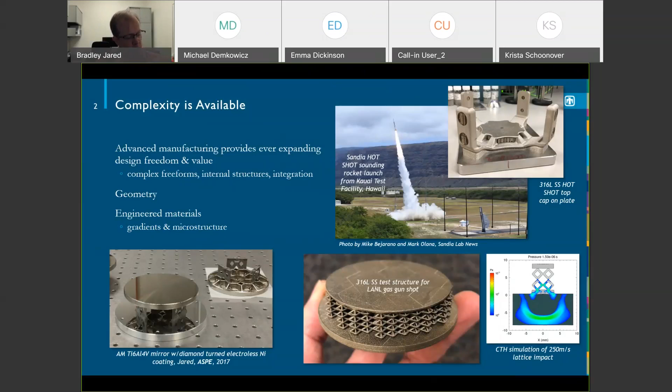Let's see. I'll talk real quickly about some of the work we actually do at Sandia, to give you a flavor in the additive space. I don't think anybody's talked about this, so I'll talk first about some of the LENS process.

This is actually a process that came out of Sandia in the mid-90s. LENS is engineered net shaping, also called directed energy deposition by a lot of people. This is a powder blown process where you basically have powder flows, and where it converges with a laser focus, you get a melt pool and you deposit material.

This is actually a custom machine we have in our lab where we can do multi-materials. You can see some things there. There's a lot of work we're doing right now with high entropy alloys, the new alloy system. So this system is very flexible, it's open, and we have control of all aspects of the hardware and the software. That gives us a lot of unique capabilities for process monitoring and stuff like that.

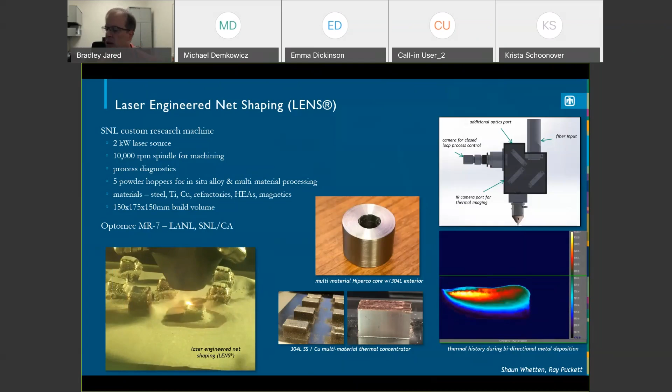We also have a sister facility in California that has a similar machine that's a commercial available counterpart to this.

Another area where we're doing a lot of work is looking at wire feed deposition, so again sort of a DED process. Now we're using wire instead of powder for a number of reasons. One is safety, right? Wire is not explosive. Powder and many of these materials, particularly reactive alloys like aluminum and titanium, are explosive and have a lot of safety risk. But it also allows us to scale up and generate much larger parts.

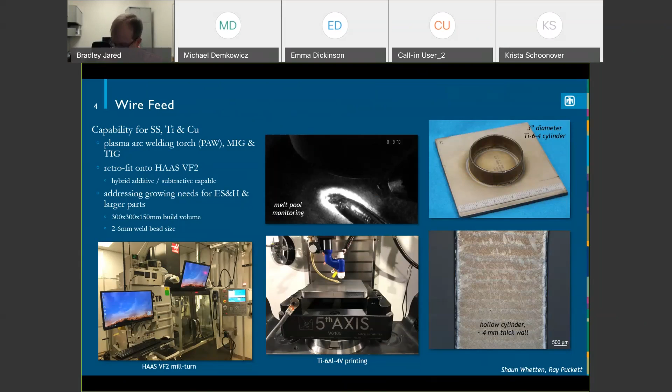This is a growing area here at Sandia and other places, large parts for large applications. A lot of times these are maybe not a net shape part, but a near net shape part that still requires a lot of machining. We've been doing a lot of work here with a range of welding technologies, and this is actually some work I'll be doing when I go to UT. You see the capabilities as an example of work we've been looking at - some simple geometries, materials look really, really nice, and we're trying to understand those sorts of things.

Another area where we do a lot of work here at Sandia in the additive space is in the direct write space. You'll see the context there in the bottom, Adam Cook and Bryan Kaeher. These are not necessarily metals - usually they're not metals, although we can do printed metals with nano inks.

There's a range of processes we have here. A lot of these are depositions or jetting processes, maybe extrusion casting. You can see there's a wide range of materials available on a wide range of substrates. At Sandia, we cover the entire gamut of this process, from formulation of the inks and materials and paste and feedstocks, to synthesizing those elements, to characterization, and finally to printing and curing and sintering and all the things that are involved.

So we kind of cover the entire process chain in this space, and we've done things from printed circuit board types of things - you see at the top, you can put conformal prints. We've actually printed battery structures and tested those and done cyclic loading on those. There's quite a bit of work looking at compression pads - you can see the pad on the side there, the sort of silicone-based geometry. We looked at different traces and inks and materials that can even cure at, say, room temperature.

We've also done quite a bit of work in the ceramic space. These are all areas of growing research interest, and a lot of work that really impacts our mission. So really exciting capabilities in this space, different from what I'm going to talk about, but again some of the same problems apply.

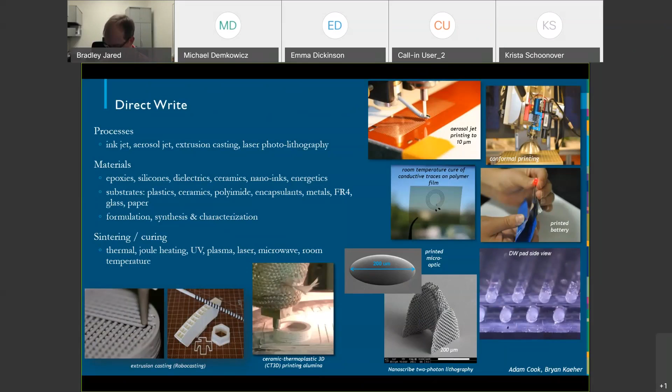An area that's really unique with Sandia, and actually the other national labs, Lawrence and also Los Alamos, is our interest in energetic materials for our mission space. So we've actually done quite a bit of material - this slide is Alex Tappan and others have done. Some of this goes back almost a decade or more, and this is work where we're looking at depositing energetic materials for a number of reasons.

Some of it's safety, some of it's performance, but these are all materials that are typically using sort of a direct ink write process we saw on the previous slide. It's all work that we're doing at Sandia to really understand, and this is actually a growing area for us for a number of applications. But it's very distinct and it's sort of unique too.

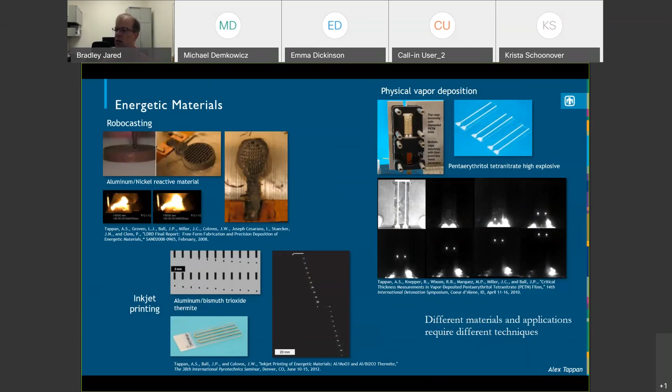You're not going to see a ton of energetic materials in the additive literature, although that's growing. The process I'm going to be working on and talking to you primarily this morning is laser powder bed fusion. This is a very popular metal technique.

The machine in our lab where almost all these parts have been made is a ProX 200 by 3D Systems. It's a continuous wave ytterbium single mode fiber laser. We run at about a micron wavelength. Max power is at 300 watts. We typically run about 100 to 110, and then we have about a 100 micron spot size.

We've built lots of parts with these. A lot of times this is a turnkey system, so we run it overnight and do a lot of things like that.

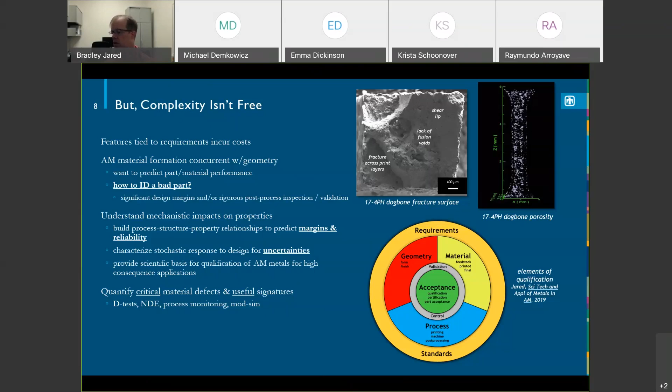One of the ways we've been tackling this problem at Sandia—this is actually a program that was completed a couple years ago, but it was a large research project called Born Qualified. The title is 'Changing the Engineering Design & Qualification Paradigm,' a philosophical comment.

We have the process, we have the parts, we think about trying to make measurements, we try to develop, understand and characterize the properties, we develop models, and then we do predictions. We put all this stuff in a feedback loop, and then we come back to something that's refined, which is the requirements. So there are all these elements in the work we've been doing.

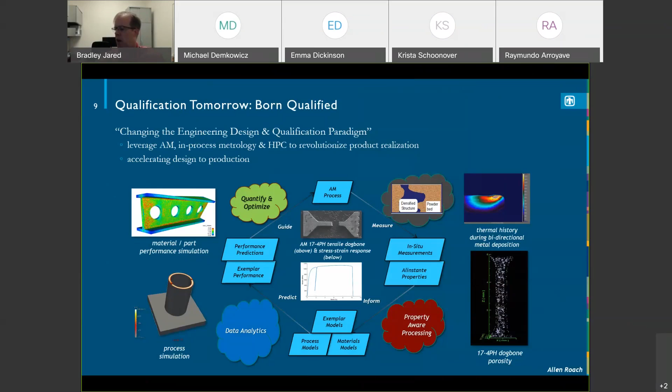I'm primarily talking about the process space. It's a little bit in the measurement space and the property space. I won't talk much about the models, although the next slide talks a little bit about the work that we are doing at Sandia. This is not my work.

This is for laser powder bed fusion. We have things going from the powder scale—this is actually DFT and molecular dynamics—all the way up to part scale, where we're looking at residual stresses and deformations, and all scales in between: microstructures and those sorts of things.

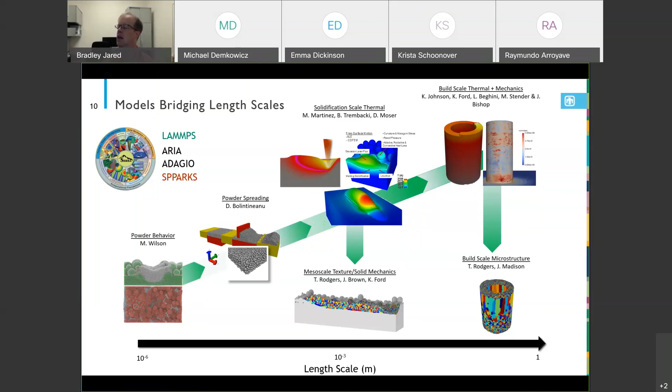So there's a lot of things going on here, and we've been working on it. It's a multi-scale, multi-dimensional, multi-temporal scale type problem that we've been working on. So a lot of different pieces of this, and a lot of the work you'll see is feeding into some of that.

One of the things we learned very quickly was that with a lot of this complexity, we can actually generate parts very, very quickly. One of the things from a project I was leading early on, 4 or 5 years ago, was the fact that we have the ability to create material very quickly, but we have to characterize it just as quickly to stay on top of the game.

So this was some original work for a high throughput tensile tester, because this is sort of where we started with trying to validate materials. We're using direct digital image correlation, DIC. You can see the bottom right animation of the actual real-time image pulling, and it gives us stress strain curves.

So what we start off with is the concept at the bottom, where we have these—we call it a cooling fin, because it's kind of what they look like a little bit. These dog bones, we cut off with a wire EDM, and then we can load these into the drop-in tensile testers you see at the top right. One of the things that was nice about this is it changed the paradigm in our lab about how we are doing tensile testing.

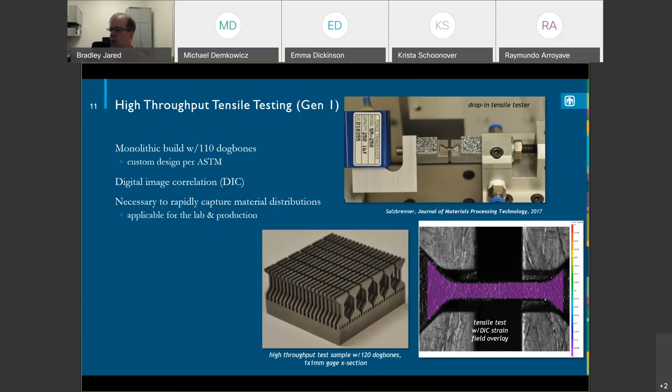Typically we use extensometers and fairly delicate, intensive setups, so a lot of times you'll get maybe 10 samples a day, or 20 if you've got a great technician. This actually allows us to do samples dropped in with custom grips on a load frame, doing maybe 10 an hour or more. We've actually demonstrated more like one every minute or so. This really changes the ability to capture large data sets.

This is important because one of the things we've learned looking at these materials is people ask lots of questions about whether additive materials are as good as wrought or whatever. My answer is always it's different. If you think about a wrought material, a casting, a forging, a heat treat, or a rolled material, they all have different properties. A lot of what we've been doing is trying to understand and quantify those materials.

Here's some early data on 17-4, which is actually a relatively poor material at this point. But the real key here is that there's a very wide distribution and spread in the stress strain curves of this material. Typically as a mechanical engineer I think about materials having a property — a modulus, a yield strength, an ultimate tensile strength, or whatever.

And it's always true, but in additive we have things like defects, surface finishes, and microstructure variations. What happens is we have a much larger spread in the material data. I have some data, I don't think I have it here, where a wrought curve sits pretty close on top of each other. So we start thinking about how do we handle distributions.

We've done work with Weibull distributions, which are very common in the casting industry and also ceramics, where you start thinking that if you get enough samples, you can establish some sort of probability threshold at which this material can perform. That can then inform how you make decisions in terms of design.

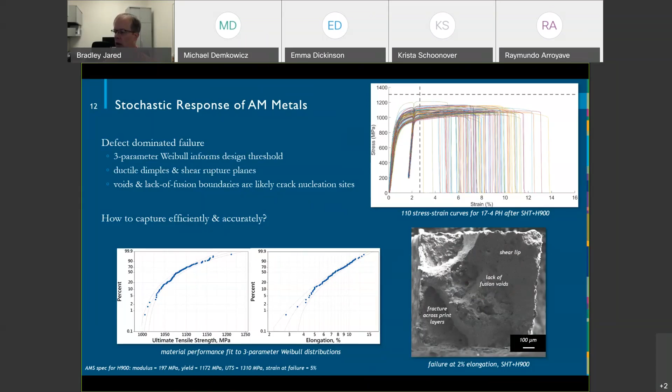Part of the question is how do we get this data quickly and fast, and that's what a lot of our work has been about. But this is, again, quite a bit of uncertainty. If you look at the wrought material here, the strain to failure range is maybe 1%, and we've got almost an order of magnitude higher than that here. So there's a challenge there.

A lot of the work we've been doing over the past few years has actually been trying to take understanding of material structures and tie that to the properties themselves. There's a modeling aspect of this, an inspection aspect of this. We've done a ton of work with micro CT, which is becoming an industry standard for inspection of additive parts. It's got limitations, but it's also got a lot of ability.

We did a lot of work early on trying to understand porosity fields and largest defect size and these sorts of things. There's a publication showing all the different porosity metrics you can come up with and what those look like — there's a number of them. So the question is, what's important, what matters? This slide's going to be a bit of a worst case, the next one's going to be more encouraging.

This slide shows a worst case. We have two different dog bones, B and C. We look at those porosity fields and think the one on the right, C, is going to have a much lower strength and lower strain of failure because there's a larger porosity field with more defects. You'd expect a large difference in performance. But when you overlay the stress strain curves, they're right on top of each other. So there's two sides to this — one encouraging, in that these defects matter, but how much do they matter? Maybe these materials can be more robust than we thought.

The other side of that is, okay, well, now how do I actually predict which one's good or bad? Because in the previous slide, this is data from those images, and you see a large spread. So how do we figure some of that out?

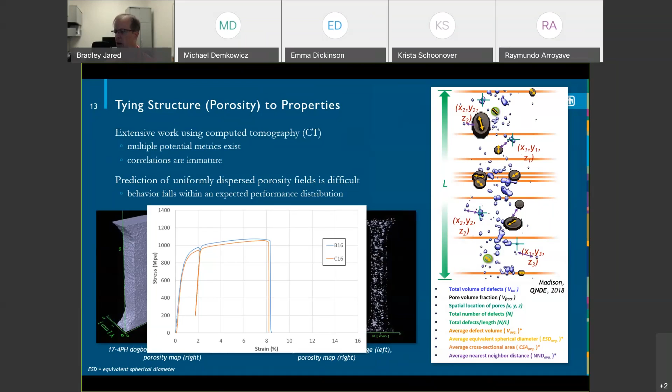It turns out, in this space—this is some other work on 316, whereas the previous slide was 17-4—you really start seeing that the models are really important and valuable. Kyle Johnson's done a ton of work here at Sandia in this space, along with another Sandia researcher, John Emery.

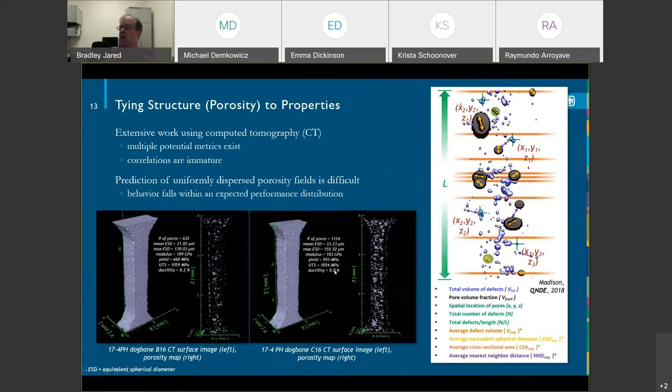What happens is if you have large gross porosity—if you look at, whoops, sorry, wrong slide. If you look at the slide I showed a second ago, it's kind of hard to say there's a worse pore in here, or that there's a really large pore. There's sort of a pore field that's fairly uniform. When you see that, you start seeing behavior that looks fairly consistent across a lot of these cases.

What we found is that if we have these large pores—this is pore size—you see this red one right close to where localized necking and failure occurs in this 316 part. You can start saying something about quality.

So we've shown that if you have material with a reasonably uniform porosity field, that's something you'd expect to fit into a distribution. What really happens is you want to think about when you're outside of that distribution.

Now what you're looking for is these large defects. That helps you think about and understand a design and qualification paradigm that will work.

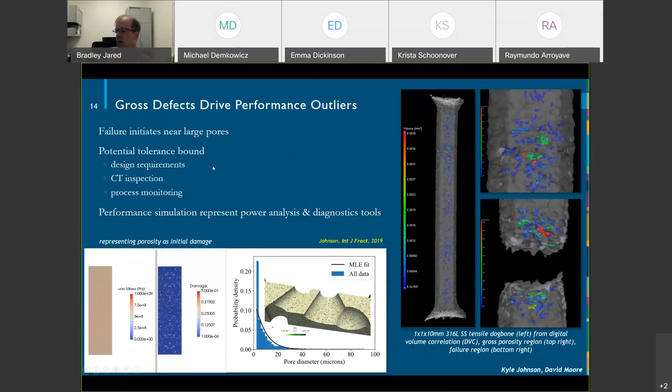If we can define minimum or maximum pore sizes, we can start saying, okay, how do I put tolerances on inspection, process monitoring, or even design. These are all things we've been working on.

One of the things that's really interesting in this space is that these parts have a lot of surface roughness on them, so you can actually get size-effect properties. People want to talk about material properties in additive components, and the reality is it gets really complicated sometimes.

What happens is we think about structural properties—you have to really understand the dog bones. This is some work we did and published.

What's essentially happening, if you look at the finite element model here—you can characterize the porosity not on the inside, but on the outside, the surface finish—you actually get a pretty reasonable trend. So we attribute a lot of this size effect to the surface finish and how you have damage initiation and cracks effectively on the surface.

The problem here is if I have a surface finish that's fairly constant—say my process has a 20 micron surface finish regardless of the size of the component—that translates to, for the 6 millimeter part, really not having much effect. It's not a big deal. You can think of this as bulk properties.

Now, if you start talking about a 400 micron sample, suddenly 20 microns—if that's Ra, that's effectively peak-to-valley of maybe 100—means a quarter of your part is essentially a crack. It dramatically reduces the strength properties, and you see that here.

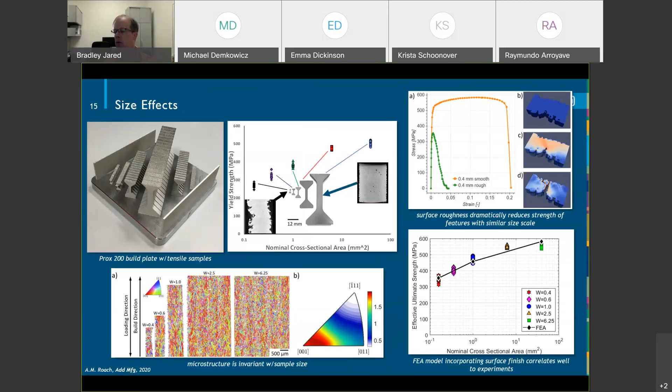We understand this, and we've been using it in lattice work and other areas to figure out what properties we need to design for a component. So we start looking at minimum feature sizes and stuff like that. This is all important.

This shows a little bit back to the process distribution—these were some early parts we received from an external vendor, 17-4.

Basically, the message here is we didn't know a whole lot about the process. We didn't know the settings, the machine type, the pedigree of the material, or anything about the operator. We didn't know about the build environment—whether they were using argon, nitrogen, those sorts of things.

This is basically 8 different tensile arrays, roughly 1,000 parts, and we see a very large variation in these, and it's very concerning, right? You see microstructure variation, you see porosity variation, and really this was not very comforting as we looked at material uncertainty of some of these materials, and so it raised a lot of questions.

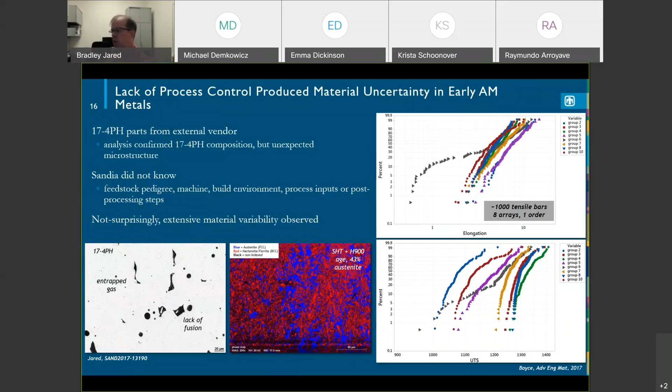I'll show a slide later that shows sort of what we've done to make improvements on this. But this is a problem, right? We don't have any control. So this is a process that's not being controlled, and it's not very good.

So one aspect of bringing control in—this is work that Michael Heiden in our group has been doing on 316 stainless steel. We've been monitoring the powder now in our machine. The previous slide was for parts we got from a vendor. This is now a Sandia material that we're processing and characterizing with every build.

One thing we found in 316, it's fairly robust, right? So now we understand if we reuse the powder, we're getting properties, we can see some of the very minor trends. But it's really important for us to track this. So every time we build a part now, we sample powder and we capture that. Now we know sort of how often we can reuse the powder and the reliability that will give to us.

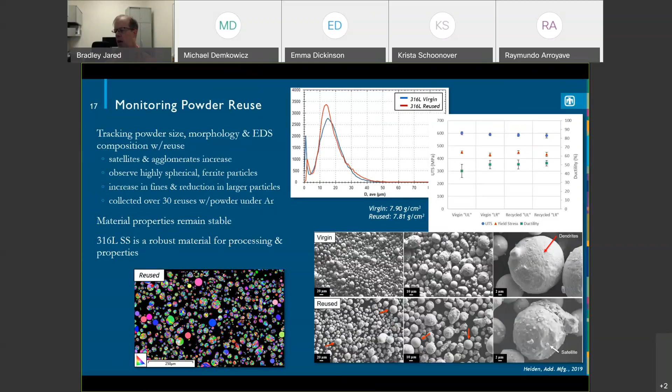Another piece of this is actually understanding the machine system itself. This was some work we did on our ProX. The image on the left shows some issues we had—actually a thermal lens effect. Basically what happened was our 100-watt laser, our 1070 nanometer laser, was heating up the focal optic, the F-theta lens in the front of the machine, and we were losing focus.

After about 10 seconds, essentially our process conditions were changing quite dramatically, and so we couldn't actually build material. We figured some of this stuff out, applied some offsets, and this is essentially the same build—this is without an offset change, and this is with it. You can see the dramatic difference in the process itself.

The key here is that a lot of people in the additive space buy equipment, kind of plug it in, and don't really understand their material or their machine system. These are all things you have to characterize. They're not necessarily difficult to do for the most part, but they're critical to getting a process that's going to be in control and within specification.

Some other work we've done—the top right here is actually looking at layer thickness, which was not something people look at very often. You see people talk about the laser, velocity, power, beam size and shape, and all this, but we've actually found that layer thickness has a very large impact on the material properties and also the reliability of the part.

This is an area where we were just measuring basically the motion of the stages, right? We see quite a bit of variability here, which is sort of in the range of what we think would be acceptable, and it seems to work quite well. But this is an area where we actually need to do a little more work. This is something you have to characterize.

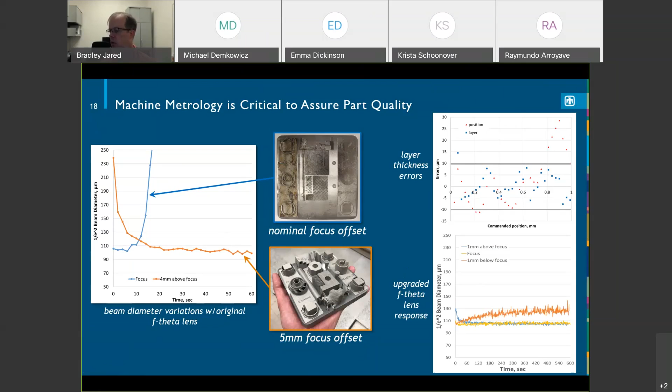The bottom right is actually from the thermal lensing problem we did work on. We actually upgraded our lens with the vendor, and this all went away. So this created a bunch of challenges—we've resolved those now, and so now we have a machine that's very robust. We're printing samples daily with a lot of reliability and trust in what we're getting off the machine.

One of the things we did is I had a student working on process structure maps. In addition to understanding the powder and understanding the machine, we wanted to understand the process space. So we did a very extensive study, over about a year and a half, looking at all the different metrics on the machine itself and how it performs.

We did a bunch of different experiments. Some of this is a little bit of a brute force exercise, but it's been very helpful to us to understand the process and how to approach a machine and understand what it's capable of doing.

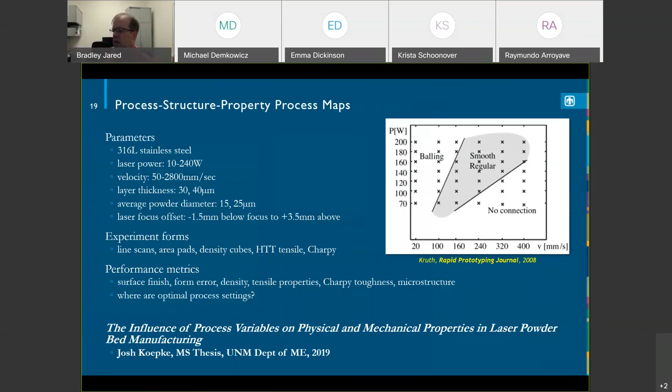In this space, a lot of people talk about process optimization. I tend not to use that term anymore because I don't believe anybody's optimized for hardly anything. They may optimize for a parameter they think, but other things are impacting that, and I'll show you that here in a second.

First thing, we started off with simple line scans. These are actually super easy to do. The challenge here is actually characterization. This scan is actually just lines on a solid plate or on a buildup of powder, or what we call a pad. The run itself takes a few seconds, right? You hit go and you blink and it's over.

But what we do is we cut these up and characterize them. They give us a really good indication of process settings, of melt pool conditions, of depth and width, whether we're getting lack of fusion or balling or keyholing or stuff like that. So these are really, really effective.

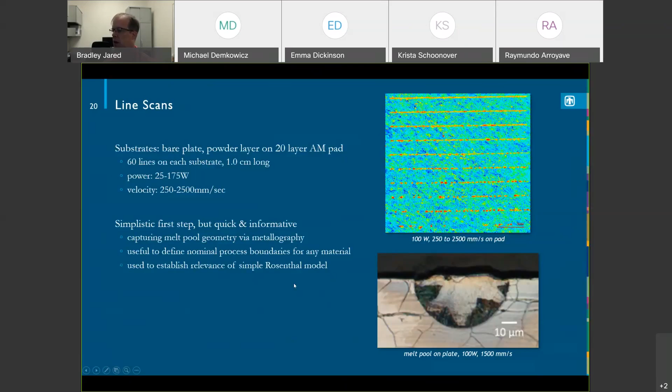We then can also translate that and do that on a pad, a little more work, not a lot, and we can do the same sort of thing. And so you'll see the trends are slightly different, but these are great starting points.

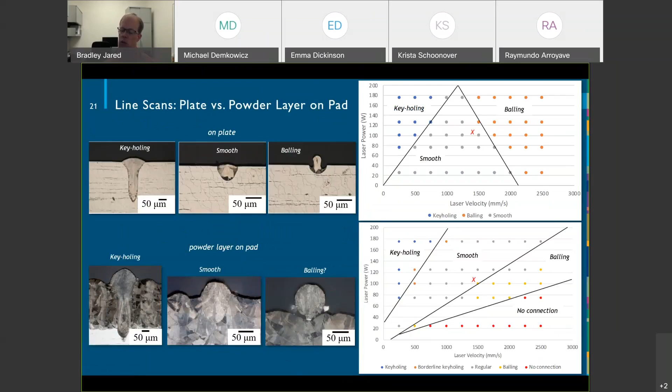One of the things we did here was we took a very simple model and fit to this. And so we have the ability to take both experimental data and even do some model fitting to do some prediction. It says, hey, if I have a layer thickness of 30 microns, what's my melt pool depth that I want? What does it need to be, my hatch spacing, to create dense material? We can do those predictions.

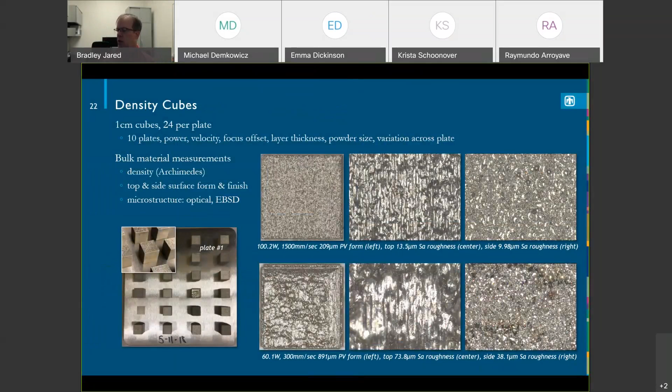We also did a large work in looking at density cubes. So there's a range of things we looked at here. Density is a metric that almost everybody uses, but it's not the end-all be-all, and I'll show you that here in a second. We also looked at surface finish, and you can see a whole range of finishes on these parts. We also looked at microstructure, and I'll show you some of the results there, because there's a wide space here in which the process will actually work.

So here's actually some results from that. Looking at the vertical axis is the laser power, the horizontal axis is the scan velocity, the circles are all areas where we run parts. The open circles are parts that failed in this space, and then the closed circles are parts where we actually were able to print cubes.

So you'll see in some spaces we actually have some surface finish data, which is related to the fact that we built a little bit, but not enough for, say, a density measurement. So you'll see a range, high density is up here in the top, but if you look at the other metrics around surface finish on the top or on the side, or even sort of form—say the waviness or the flatness of the top surface—just because I get good density doesn't mean I necessarily get good surface finish, right?

So when we start thinking about process optimization, it really needs to be multiple factors, multiple constraints in terms of what you're looking for. That's a key piece that a lot of people don't look at. If you look at this X on this image, this is actually our nominal settings for our machine itself. Turns out when we look at all this data, I don't know how the vendor got to this point, but the point they've given us is actually reasonably good for creating parts that have good material properties, good surface finish, and reasonably good form accuracy.

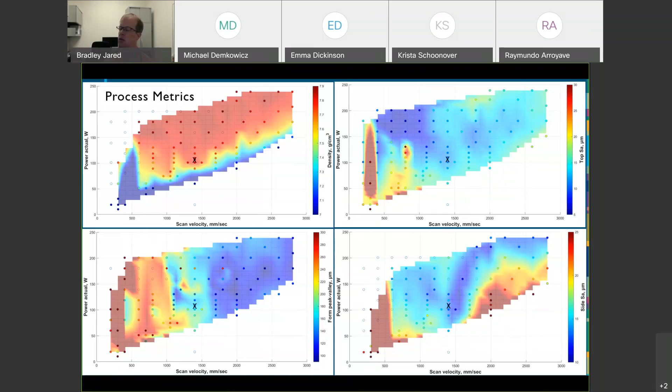I don't know how they converge to that point, but it's interesting that our settings are somewhere in a place where you'd want to be. It may not be the minimum surface finish, but it gives you a good constraint on all those metrics. With microstructure, one of the interesting things in this space is everybody cares about material properties, and you see a lot of variation in these machines, with lots of wailing and gnashing of teeth about why this is a problem. This is part of the challenge, and part of the reason why.

These are all cubes that built just fine. Some of these are actually quite good density, but the microstructures are quite different, and this is going to change the properties, as we'll see in a second. So now you have to think about what's acceptable, what do I need, what can I work with. But you really need this kind of data and understanding of the process to really say, yes, it's working, it's doing what it needs to do.

It really turns out you have a wider process space, at least in powder bed fusion, than a lot of people sometimes think.

So this is actually showing the settings, 120 watts. This shows what happens if you just change the powder layer by 10 microns. So this is 30 micron versus 40 micron change, and you see a dramatic increase in porosity and a reduction in the microstructure, the grain size. These are all things a lot of people don't always think about, like layer thickness - they just think it's 30 microns, but it's not really, it's a variation.

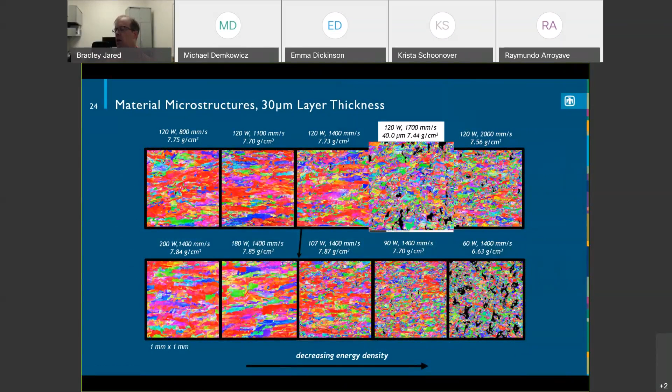So these are all things that probably introduce a lot of the variability we see in the processes in some cases. A lot of the data you're seeing here is actually from our Gen 2 high throughput tensile tester. When we started the Gen 1 work, we realized it worked extremely well, but we found the bottleneck was actually having to have a technician or student loading samples by hand every minute or two.

So what we did was we went in and changed it - we added a linear axis to our load frame, and now we're using DIC from the side instead of the front. We're automating, so now this will hold about 50 or 75 tensile bars. We can load up a frame and the technician can walk away from it for an hour, so now we can load things at a much faster rate.

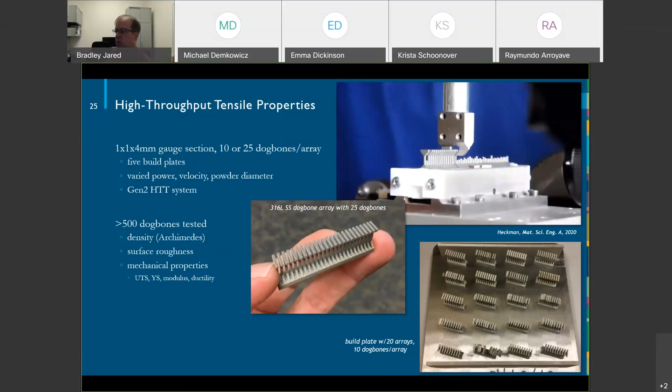We use this quite frequently. In the 4 years this system has been up and running, we've printed and tested probably multiple thousands of tensile arrays, so we've got a lot of data here. One thing that's nice about the samples is we can get things besides tensile properties - we get density, surface finish, all those things off the system.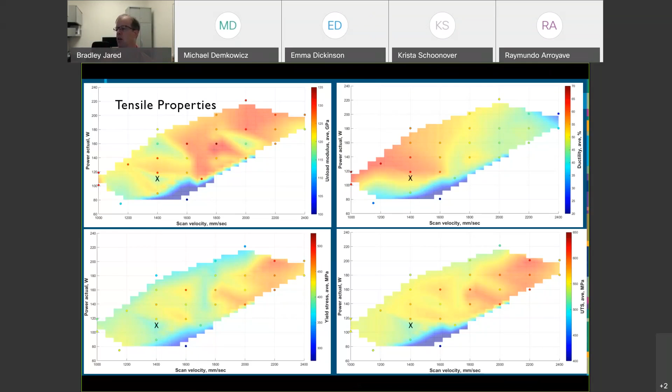So depending on where you want to be, we actually did some work where we were getting ductility a little lower than we wanted at nominal. We showed that if we increase or change our settings, we can actually increase the ductility of this material, maybe at a reduction of yield strength, but that was acceptable for that application. So what this gives you is another design knob - I can take my process or my geometry and tune the properties of my part. This is really exciting to the process folks and even possibly to the designer, giving another level of control that may be useful.

So here's actually data, taking all these pieces, the powder, the machine, the process, the settings, understanding those types of things, understanding porosity defects. This is a similar scale to the slide I showed earlier with 1,000 dog bones. It's not 1,000, it's more like 600, but this is data over about a year and a half, two years on our machine with an upgrade in the optics and also changes in powder. You can see a much better, much tighter distribution in terms of properties. Still a spread, still a variation, but the distribution is much tighter.

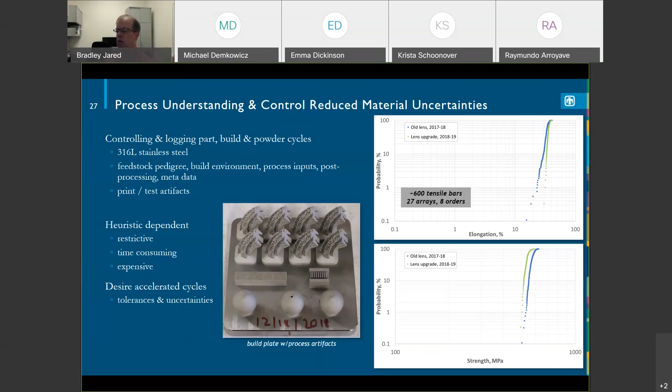We have much more reliable control of what's going on, and we can use this information to inform a lot of things on the design side. Real quick, I'll wrap up - I think I'm running out of time here, but let's look at some of the other work we're doing.

I talked earlier about the fact that large defects are a problem. How do we identify these? This is work we've been doing, which is a lot of fun, looking at real-time monitoring. On the left there's an image showing tracking of the galvo motion of the laser itself. You can see in the bottom left there's actually deviation - this is what it's supposed to be doing, and we see a millimeter of travel variation. This was a test run, just checking some stuff with the galvos, and we saw this error, which was very unexpected. This could potentially have an impact causing a defect.

We've also done a lot of work looking at melt pool monitoring, looking at pyrometry and the melt pool signatures. There's a lot going on here, right? This is a really dynamic process, a lot of things are happening. It's amazing that we actually create good material sometimes when you look at these images.

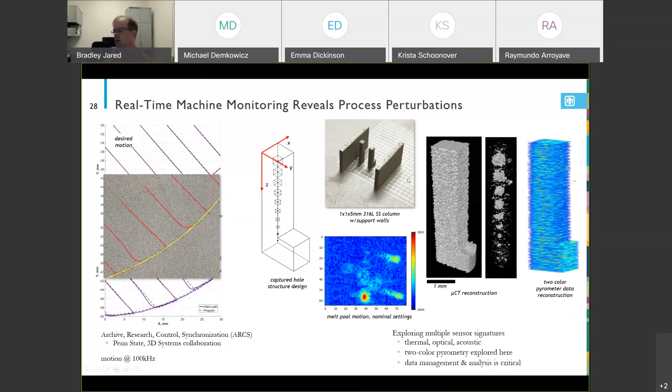We did a bunch of CT data inspection of these parts, looked at the pyrometry data, and have done some things like machine learning with clustering algorithms to show that we can predict and find these outliers in the melt pools that correlate typically with spatter events - basically an upset where you have molten particles flying out of the melt pool. We start correlating these, and we can identify these large porosity voids in the structure. This gives us the ability to find porosity.

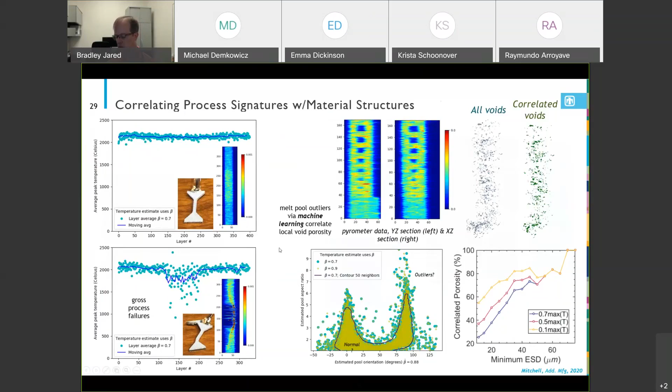We've also shown that when we use this pyrometry data, we can find deformation defects in the part. It's pretty obvious when this comes off the machine that this part failed here on the bottom left. But really what you could do is start monitoring these and say, hey, I've got a problem, I need to correct something - I may have to stop the build or change the build. So it shows you a path forward to doing possibly either local or even global process control on your machine to improve the performance of the material and what's happening.

Real quickly, again addressing the complexity piece, there's a lot that has to be done in terms of data management. Aaron Wong has been working with our group this summer in this space, looking at taking micro CT data from lattices, some complex geometries. But there's a lot of things required to try to take these data sets and do analysis. There's not a one-stop shop tool at this point - although this is a little dated, some of these are consolidated, but there's a lot to be done here in managing the data.

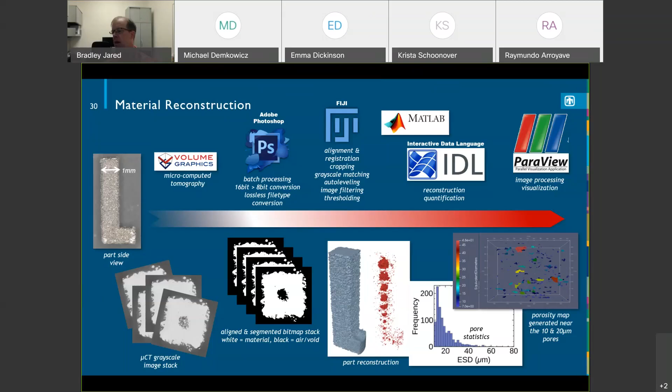I think my last slide is basically talking about that. We have a lot of fun with a lot of the processes and the materials and doing the testing and the characterization. But one of the things I've learned in the three or four or five years doing a lot of this work is that the data is becoming a huge problem, a need, a challenge, and a point of emphasis.

A lot of the work we've been doing is trying to figure out how do we manage the data from the build, from the process. We have process sensors—what do we do with all that data? It becomes a big data problem pretty quickly. There's a lot of space here in additive to really address a number of research and R&D topics for students, for professors, for people at the labs. These are all things we're looking at and trying to deal with this complexity.

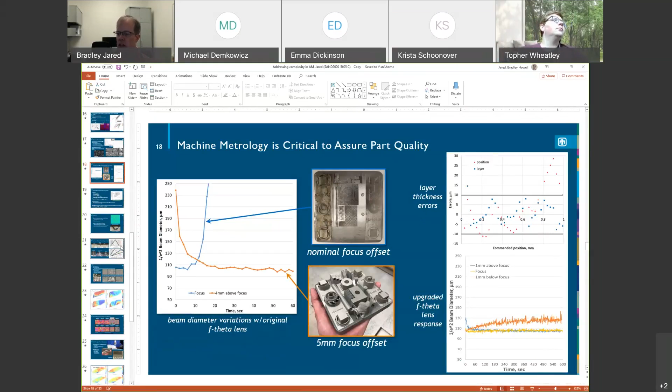Yeah, that's a great question. Actually, if you look at the data there's a bit of measurement uncertainty, and that's one of the challenges with this data set. But when you start thinking about the layer thickness, it becomes a challenge. There's a couple ways: one is the machine itself, the other is the fact that you're putting down powder and you don't actually have a consistent layer. So you start thinking, if I have powder particles that are deeper, how does that impact variation in the laser process? And if I have a thicker region, is that going to melt and solidify properly? You have to make sure you have enough heat to melt that. If those deviations are large enough, you could actually have inadequate melting. This is an area where there hasn't been a whole lot of research. We've got some experimental data, but haven't really explored this like we should have. I think it's a topic that's probably not been appreciated, and people don't really talk about it much, but it could be a source of a lot of variability in these processes.

Typically with the settings on the machines, we're melting a couple of layers with the melt pool itself, but even then there's certainly an opportunity to have deviations and issues with that. And to your point around the temperature profile—if I have a deeper powder, powder has a different thermal conductivity than the solidified material, so the conductivity is lower. You actually retain more heat in powder than you will in a solid material. So it absolutely changes the boundary conditions of the process, which I don't think anybody's really characterized. We thought about it a little bit, but it's a good research topic. Good question.

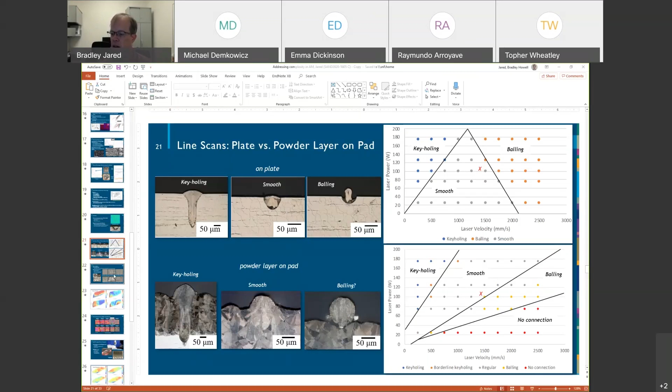In your results where you show the dramatic decrease in variability in the mechanical performance of the AM parts, was this the outcome of finding the sweet spot in the process window, in the process space, that minimized the likelihood of having all kinds of potential defects such as keyholing, lack of fusion, or other types? Great question.

That's one thing. The other thing is we did do the work to characterize our machine, and we eliminated a lot of the variability and the challenges. After the fact, we learned on the 17-4 material that the material was printed on multiple machines, potentially with multiple different settings, and so there was all kinds of variation occurring there. Again, the piece here is to understand your machine and to know where your settings are.

To some extent, the process maps that I showed you really aren't necessarily important here. They could be if you want to change your setting and your set point to say, I want different properties, I want to guarantee different elongation to failure, different yield strength — you can do that. But what you really want to be able to do is say, okay, I know what I need, now I know how to set that and make sure it's in that regime, so I know my machine is stable, I know what my machine is doing. I think that's a big key to addressing that.

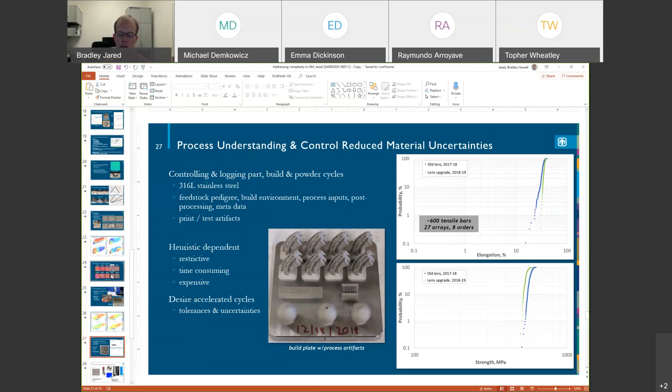Then the material would act like any other material that is limited by the statistical distribution of defects. Like in a ceramic, you have a lot of variability because ultimately fracture strength is going to be controlled by the population of defects that you have, right? And in an additive manufactured metal part under tension, if you're in a region of the process space where it's more likely to have porosity of different kinds, it's probably more likely that you're going to have a distribution of performance, because the distribution is not going to be controlled by the intrinsic properties of the material, but by a particular instance of defect populations in that material.